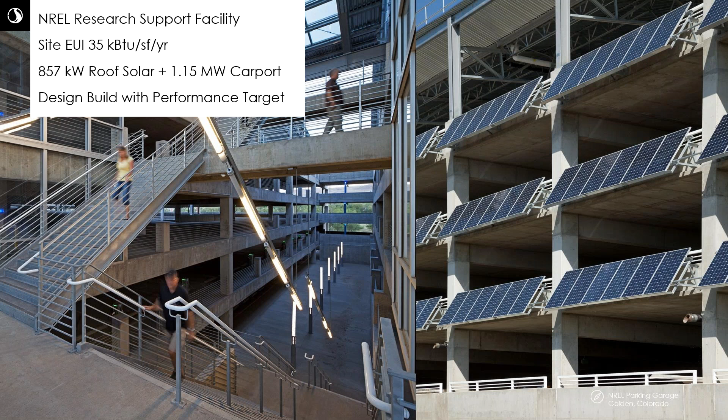And the innovation here we're seeing is that the client is going into a lot of detail on how they're using the energy model, the requirements that they're looking at through design of how the energy model is being used to track performance, and also post-occupancy. A lot of post-occupancy work is going into this building. So in this case, there were 2 goals and 3 model uses.

Next slide, please. Goal number 1 was we were given a site EUI goal, not to exceed. Goal number 2, we had to achieve net zero source energy with a 10% safety factor. And if that net zero source energy is not met, the design build team needs to come back and install either additional PVs or implement additional EEMs, energy efficiency measures, to get to net zero.

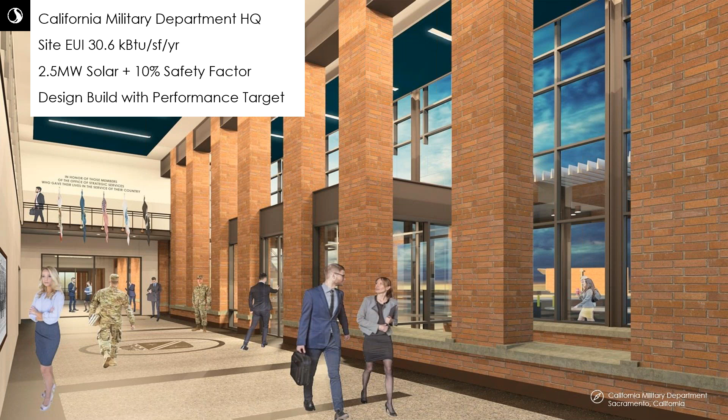But the PVs can only address a maximum shortfall of about an EUI of 5 kBtu per square foot per year. After that, we have to put in EEMs. And we all know how painful that is, to come back to a project after it's been built and address additional EEMs. So that's a pretty high target. Next slide, please.

And to add to that, on the California Military Department headquarters, we were asked to model the building in 3 different states. One was cold shell, so it's fully conditioned but unoccupied. The next was occupied and conditioned, and the next was occupied, conditioned, and adding in PV.

And I'll go into more detail on that later, but it gives the client the ability to monitor the impact of occupants on the energy use, comparing the building unoccupied and occupied, and also sets up a level of accountability for the design team to meet those goals. And that's what I mean by innovation in the playbook, a level of sensitivity and accountability. So this project actually just opened up last month. So the building is up and running. We just don't have an updated picture of it.

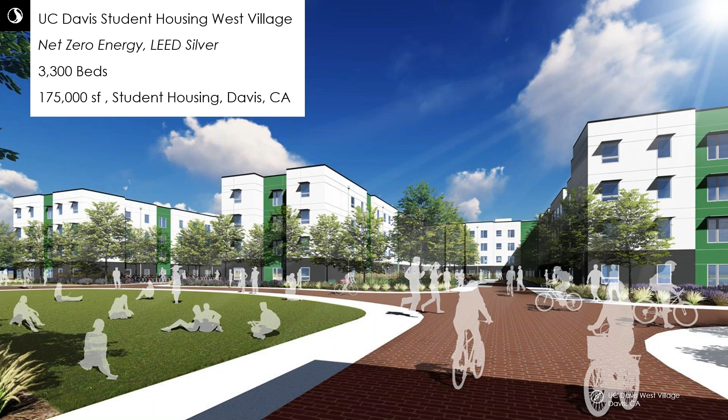And student housing may sound like a simple and fairly repetitive building type to do the net zero math on, but that equation gets very complicated once you factor in the known unknowns, should we say, of all the equipment, whether it's beer fridges or TVs or lava lamps, whatever students are putting in their dorm rooms. Those tend to complicate the energy model because those plug loads are often a shot in the dark, as I'll talk about later on. Next slide, please. In addition to a lot of on-site food services that come with student housing, and let's not forget the room dedicated to Amazon deliveries, all the good stuff for today's lifestyle.

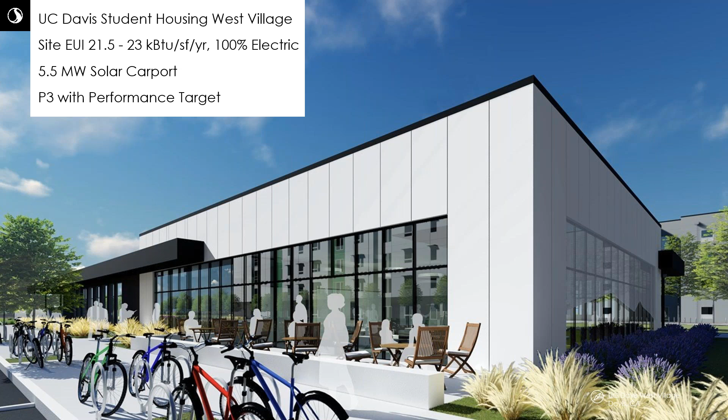Next slide, please. We're also seeing, when I go back to what I talked about, playbook, place, and how to scale these buildings. We're also seeing the portfolios moving from net zero energy to net zero carbon, and from the boutique buildings to the speculative template-driven buildings, which is fantastic, and that's how we scale. And this leads to the next innovation I'm talking about, that is place.

This is evolv1. It's Canada's first building to achieve zero carbon design certification from the Canada Green Building Council. And it's located in a research and technology park, the David Johnston Research and Technology Park in Waterloo, Canada. This project was led by the Cora Group, who are a fantastic community-minded, innovative developer in Waterloo. And they really decided that they wanted to redefine spec development. They wanted to raise the bar for what an office building could achieve.

And they asked for a carbon neutral office building that prioritized occupant health and well-being, built at market rate, that's critical, and that could be used as a template for the next generation of speculative office buildings.

Next slide, please. The building was occupied in late 2018, so it's just about coming up on its 1-year measurement verification period. And for those of you familiar with the Canada Green Building Council Zero Carbon Building Standard, the building is 105% energy positive, thanks to a lot of PVs, and you see this amazing solar carport here, and then there's PVs on the roof, but also really attention to the building envelope and internal loads, and brought that EUI down as much as possible. And in addition, it's on track to achieve carbon neutral status on an annual basis.

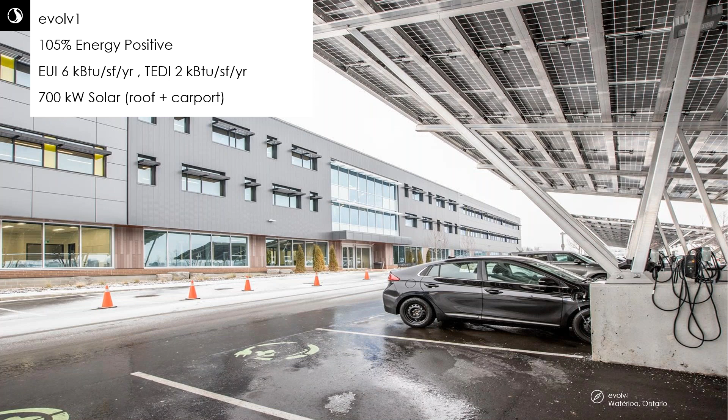And interestingly, in terms of talking about raising the bar for goals, net zero energy is kind of the baseline. In addition to meeting the EUI goal, the team also met the maximum threshold for TEDI, which is not a soft toy that was kept in the office for hard times, but TEDI stands for Thermal Energy Demand Intensity, which is a metric in the Zero Carbon Building Standard that looks at the annual heat loss from the building's envelope and ventilation after solar heat being accounted for. So I'll cover this later, but again, EUI and net zero energy is not just the end goal here. Next slide, please.

And so there's a list of all the systems, and based on the time we have for this presentation today, I'm not going to go into detail on all these systems, but hopefully you can see that there's nothing here that really is not in the marketplace already. However, there is one thing, that this was the first building to tie into an open loop geo-exchange field in Waterloo. But other than that, the market has all these systems already.

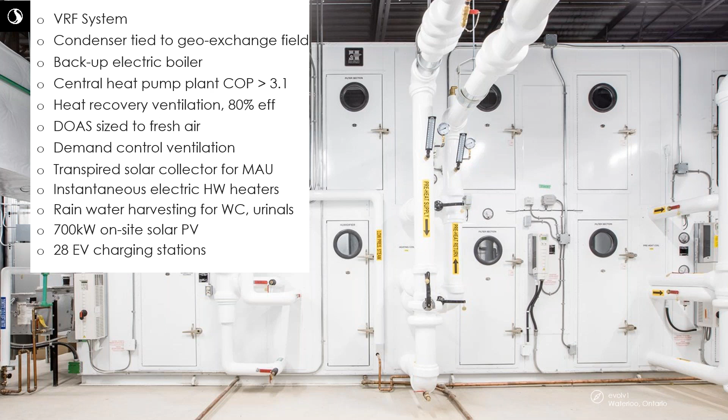What's unique here was, first of all, we used parametric design modeling to make decisions from day one that included a whole range of factors, and very quickly turned through a number of different design decisions. And also with an eye on market rate construction costs, and looking at how the carbon intensity of the grid was impacting the design of this building. Next slide, please.

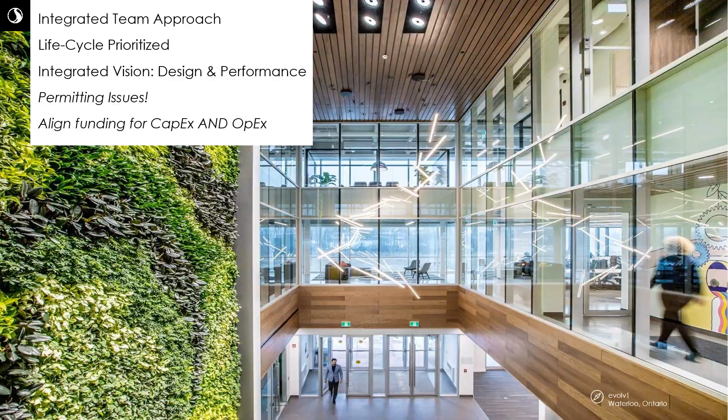We also looked at, I mentioned this was driven by health and well-being. So the University of Waterloo is carrying out extensive post-occupancy research into the impact on health and well-being of the folks in this building, working in a high-performance building that prioritized daylight and healthy materials and so on. And this was a speculative office building, but it was at full occupancy from day one. So the messaging around this is a high-performance building, it's carbon neutral, this will support your corporate sustainability goals, was very, very impactful. Next slide, please. Actually, if you can jump to the next one as well, in the interest of time.

So when I talk about the playbook, it's not just about the energy model, but also about other technology that's entering the design process. So, for example, virtual reality is becoming very helpful as we're putting more and more sensors and controls in our buildings. Being able to use virtual reality to let occupants and facility managers walk through the building and learn how to use it before day one, that is also critical in meeting any net zero energy or carbon neutral goals. And it also helps make decision making much faster based on more detailed information. Next slide, please.

And then also on the envelope side, I mentioned this new metric TEDI, which has really been something quite interesting to consider, because what it does is it results not only in greater occupant comfort, but also it really ensures that designers focus on minimizing the building's energy demand prior to procuring renewable energy. And so it's not just business as usual with a massive PV array on top. It's looking at really dialing in this energy use.

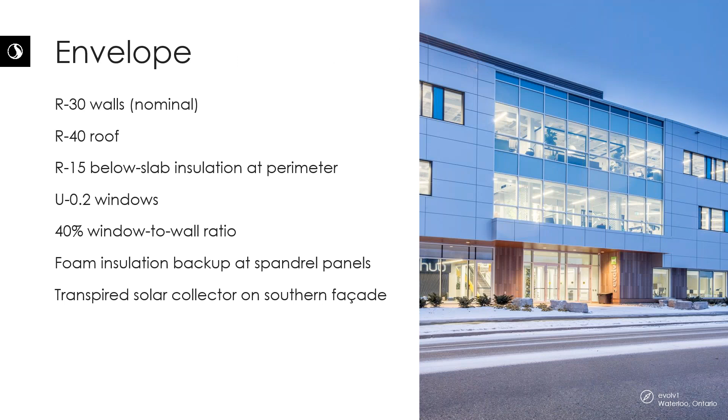But what I did want to say is, as we're looking at energy performance, and as we're looking in more detail at the envelope, I do think this is an area that we're seeing significant innovation, and not just for comfort. Looking at envelope is not just about maximizing leasable space in perimeter zones, but we're also seeing this become a matter of survival, particularly in the face of our changing climate these days. At Stantec, we do a lot of work in communities, in remote locations, both hot and cold, where survival and the impact of the envelope is really significant.

I'm going to end with this slide. This is a study that was done fairly recently, where we looked at 4 different house type constructions up in Yukon, northern Canada, Yukon territories, which is really, really freaking cold. And we looked at what happens to the internal temperature once a winter storm hits. The power goes out, you have no mechanical heating. What happens to the internal temperature in that house as the days go by? And you can see the spikes are due to global radiation, where the sun came out.

And the difference between the standard 1980s construction and the passive house type construction is the difference between 19 hours and 216 hours before the temperature fell to a temperature that was harmful to health. That's the difference between first responders having to reach a community of vulnerable populations the day of a storm, versus having a few days and knowing that as long as that person has food and water, they're going to be okay. So when we talk about envelope performance, it's not just about comfort, but it's also turning to a matter of survival as well.

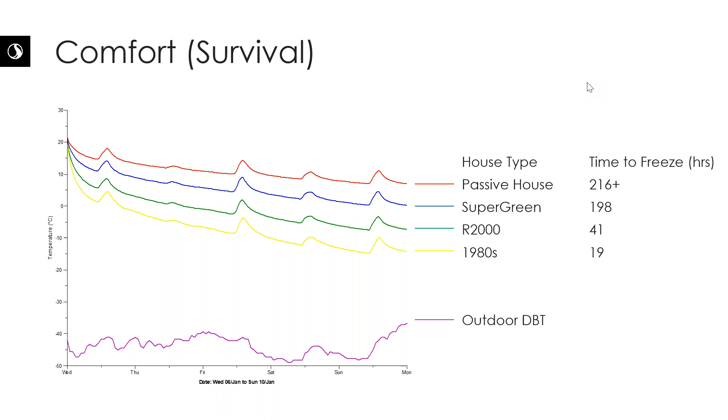Thank you so much, Rachel. That was excellent. And I really appreciate how you covered a landscape of a number of different very impressive buildings. And in a number of them, I noticed that you mentioned cost considerations too, and cost constraints of whether it was market rate or a fixed government budget, that you were able to achieve that type of performance on budget, just by using some of those techniques in the playbook and modeling and prioritizing performance specifications. So thank you, that was excellent.

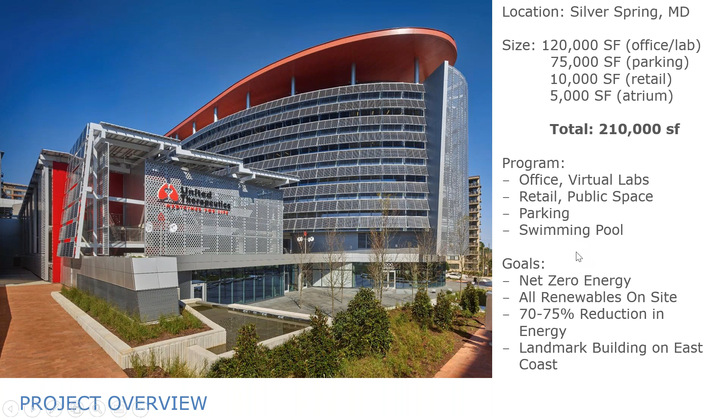So when we talk about design process for net zero, it's a little bit different than our traditional design process. So before we even put pencil to paper on the design, we start with a goal setting and benchmarking exercise where we look at energy use intensity and what we think we can realistically hit for the building.

Now, the challenge with this building was that in 2011, there wasn't a whole lot of data available for low energy buildings, certainly nothing of this size or in this location. So we took the information that was available, what little information there was, and we supplemented that with our own energy modeling to begin to set those goals and benchmark.

We then moved on to early modeling of modules. So instead of just jumping in and modeling the whole building, we looked at a typical module, like an office module, a conference room module, et cetera, and we began to optimize each of those on their own, looking at things like the envelope, lighting, equipment loads, HVAC system type, et cetera. And once we really optimized that, then we could extrude that out to the entire building.

We then continued to model all throughout design using the energy model really as a decision-making tool in our process. And then we continued that modeling through construction so that we could ensure that the model was as accurate as possible when we went into our post-occupancy measurement and verification period. So at the end of the day, it doesn't come down so much to form following function or function following form, but it's really about the two informing one another.

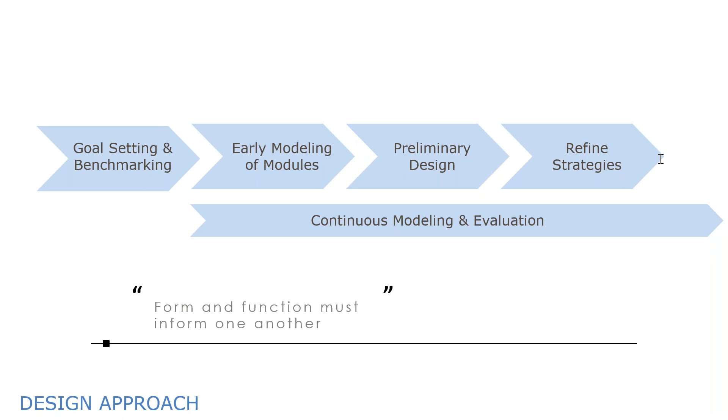So early on, we wanted to set the expectations for the building. Some people might have a negative connotation of net zero buildings, thinking that they're going to be underlit or hot in the summer, cold in the winter. So we really wanted to set that expectation early. So working with United Therapeutics, specifically with their CEO, we talked about expectations for the interior environment.

Most specifically, were we going to design to ASHRAE 55, which is the thermal comfort standard, or were we going to do something outside of that envelope? And ultimately, it was decided that we would design to ASHRAE 55, but we would be at the edges of the envelope, which would result in temperature and humidity swings throughout the course of the year.

The way we corrected for that was by providing a higher level of individual control in each zone. So within each office, the occupant has control over their temperature. So there is a thermostat in every office. It is limited by the BAS to 1 degree in each direction. They have control over their lighting, both at the task and the overhead level.

They have control over air movement through a ceiling fan in each room. They have control over daylight penetration into the room through an electrochromic glazing system. And during certain times of the year, they can even control the amount of ventilation to their space through operable windows.

But the other piece to this was really to train and educate the employees about their role in the success of this net zero building. And the way that we did that was by using data that we have available through the building automation system and feeding that back into the spaces so people could understand how the building's performing. And I'll touch on that a little bit at the end.

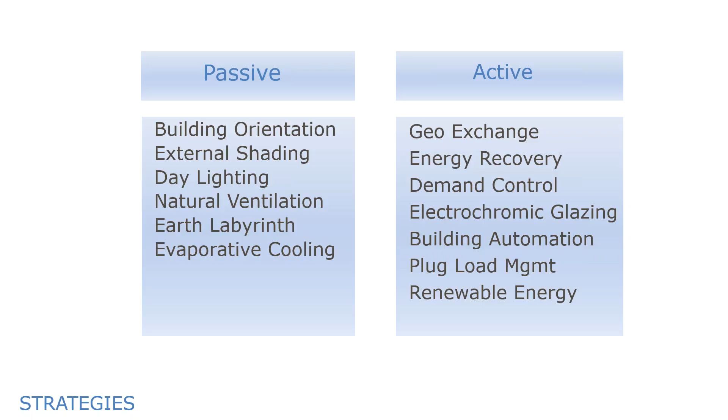We knew that energy generation was going to become our limiting factor, and that caused us to actually adjust the program in order to meet the net zero goal, which dictated size of the building, number of occupants, and even the activity levels that we could support in that building.

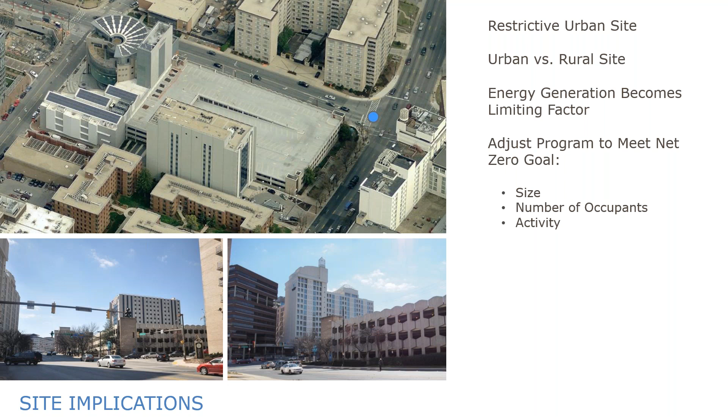The elliptical form has an atrium in the center. There was a real benefit to this because it provides a relatively shallow floor plate, only about 40 feet at its deepest dimension in the office. And that's very good for daylighting and cross-ventilation of air in natural ventilation mode. In addition to that, to encourage stair travel, we hung a monumental stair in the atrium, which is visible from all areas of the office, and we pushed the elevators to the far ends of the floor.

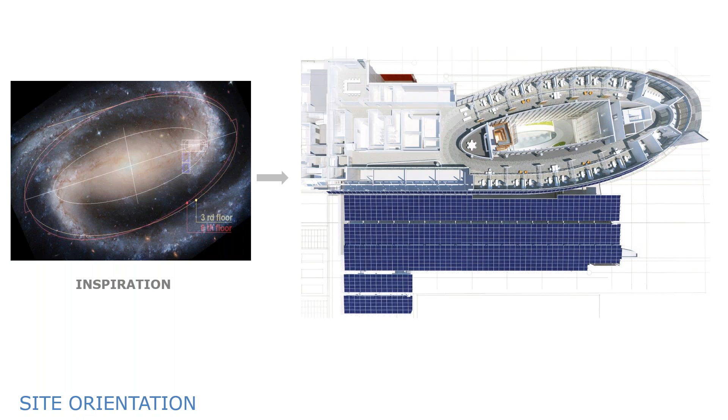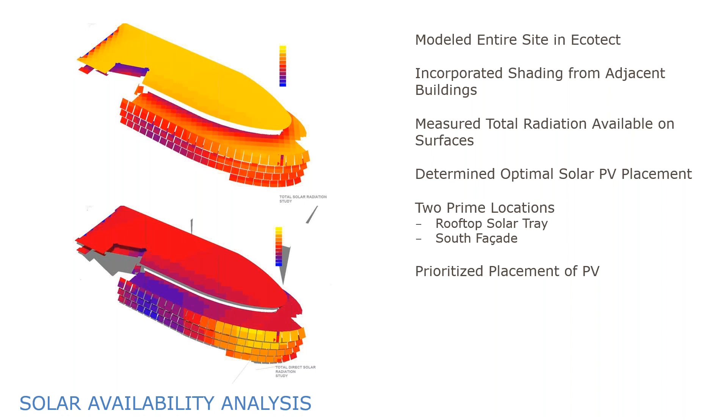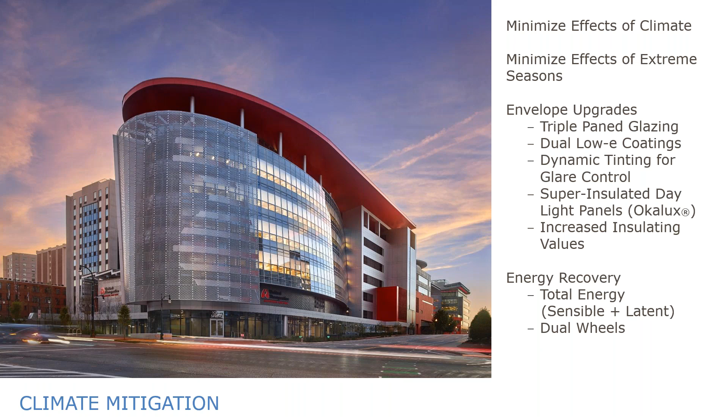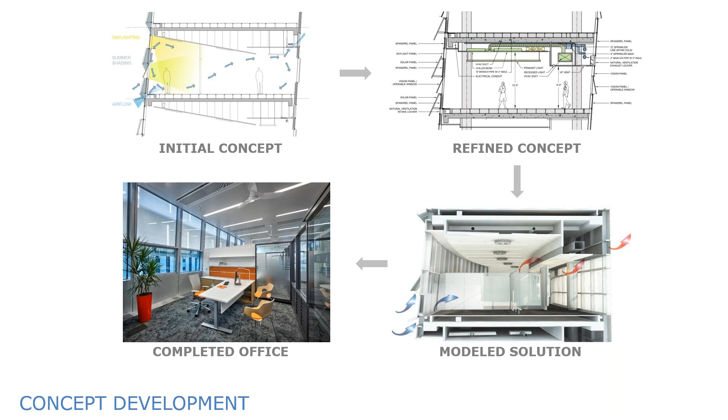Generation of the concepts and development, we kind of started in the top left, understanding how air and light move the space. We then moved into our DD phase and refined that concept, overlaying the engineering systems and really beginning to understand that southern wall and all of the aspects and elements that are on that wall. We then modeled the entire solution in BIM and then actually completed the offices to make sure that they turned out as we intended. Next slide, please.

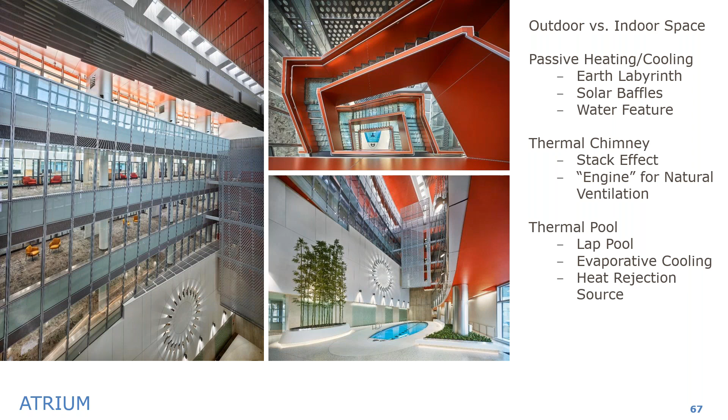The atrium is a key design feature of the building. One of the interesting features is that it is not an actively heated and cooled space. It is passively tempered through an underground earth labyrinth, which I'll touch on in a moment. In addition to that, we use the form of the building, the height of the atrium, to create an engine for natural ventilation through stack effect. So the atrium actually induces airflows through the building in natural ventilation mode. And finally, there is a swimming pool in the atrium of the building, and we actually use that swimming pool as a heat rejection source for extra heat that we have in the building. Next slide, please.

The atrium is passively heated and cooled through a 1/4 mile long underground concrete earth labyrinth. It has 3 chambers and a bypass that we can modulate airflows through. It uses essentially the thermal mass of concrete in contact with the relatively stable temperature of the Earth at 4 meters depth to provide some heating effect in the winter and cooling effect in the summer. We have been through both the heating and cooling season with the labyrinth, and it has exceeded everyone's expectations. Next slide.

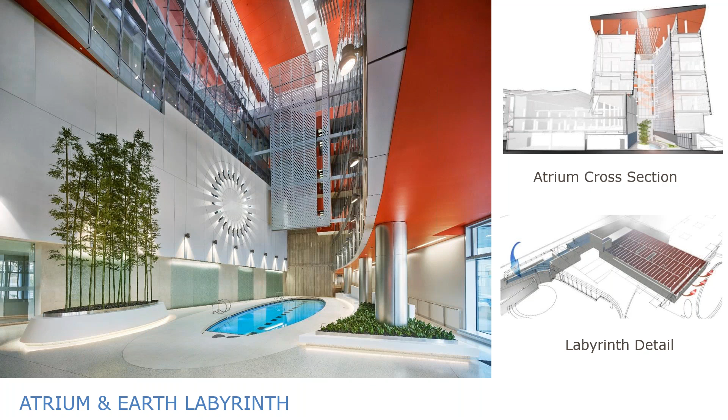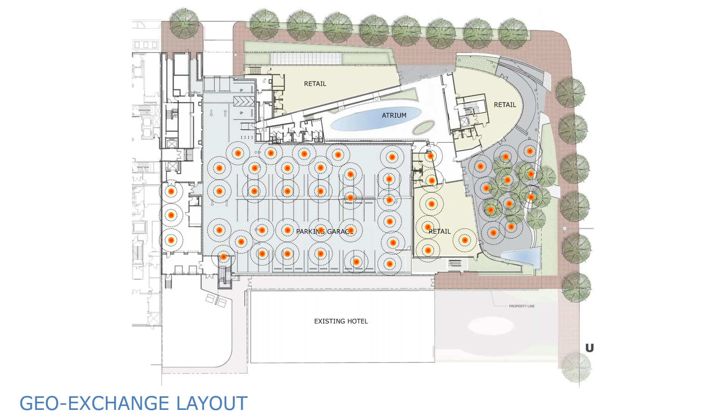Speaking of relatively stable ground temperatures, the geo-exchange system consists of 52 500-foot deep wells that are located on the site, mostly beneath the building. That actually required getting regulations in the state of Maryland changed to do that, but that is one of the requirements when you're on a tight urban site. You don't have a large area to put the wells outside of the building footprint. Next slide. And then the geo-exchange system feeds into a series of water-to-water heat pumps, and they feed an active chilled beam system for the office. We modeled several system options, and we found this to be the best option for this particular project. Next slide, please.

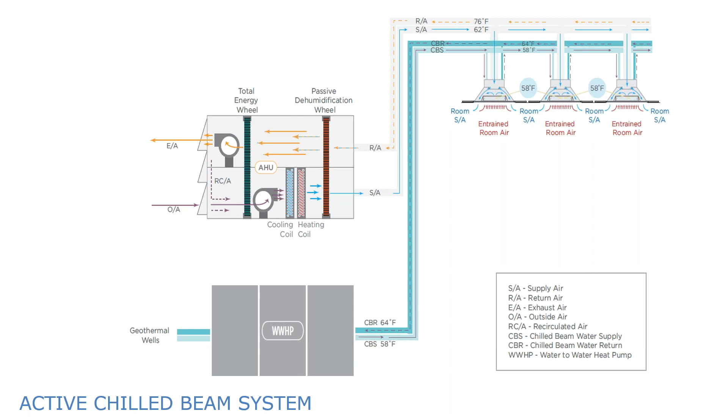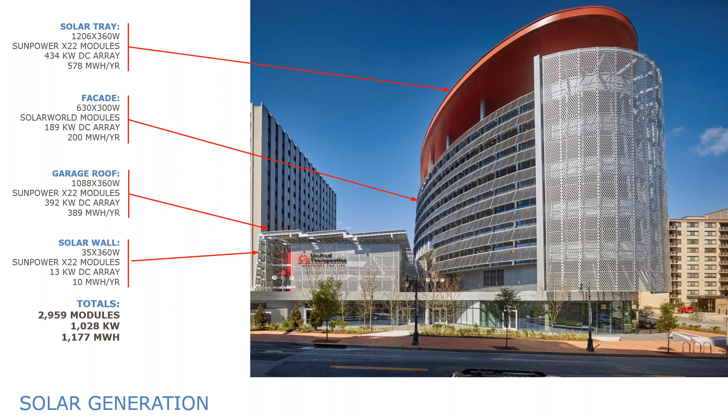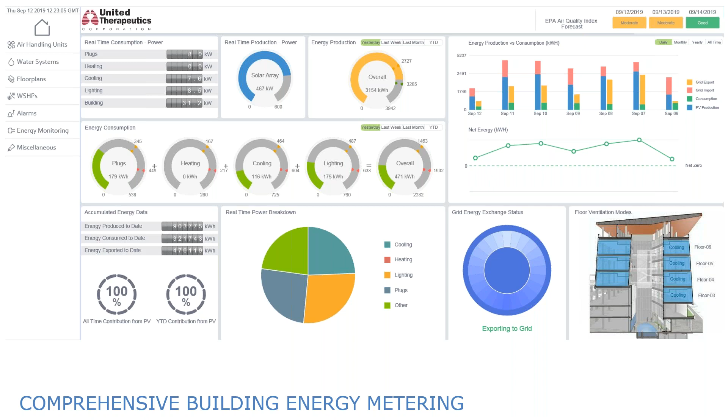So one of the keys in a smart building is that we have over 11,000 integrated devices, 6 control platforms that are integrated into one dashboard. So what do you do with this intense amount of data? The solution here was to provide a custom dashboard, which is a red, yellow, green dial system that the facility operator can, at a simple glance, understand how the building is performing, and then click down to the appropriate level of detail to do any troubleshooting that they might need to do. Next slide, please.

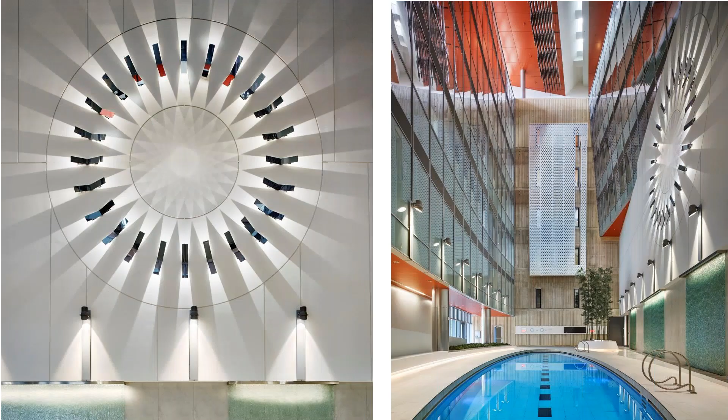And finally, we did a large-scale display in the atrium. This is an LED light display that essentially gives a real-time sign of how the building is operating, whether it's exporting or importing energy. So if the lights of this dial are shining inwards, we're importing. If they're shining kind of in this form, inward and outward, we are actually net positive at that moment in time. And that's just a quick way. This is visible from all the office areas for people to understand how the building's operating. Next slide, please.

So with that, that's my last slide. The building, like I said, has been running for about 6 months. Our modeled EUI was 26. We're running about 20% below that number, which is a good thing. So with that, I thank you.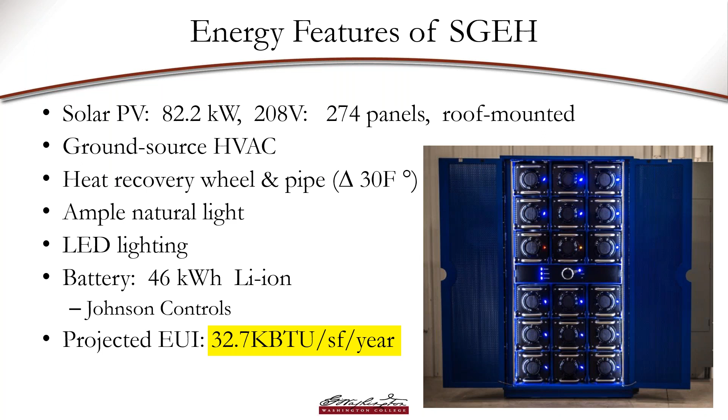So again, the decision-making metrics to get here: we really wanted to honor Mr. Semans and Dr. Griswold. The donors for this building, who we recruited from supporters of the Center for Environment and Society, really drove the decision to make this a green building. I don't even think all of the donors completely understood what that meant, but they do understand that green buildings are important to campuses and that green buildings drive things like enrollment and public image, as well as the physical sustainability for the college.

This was a pretty expensive building on a per square foot basis. If you run the numbers in your head there, you're looking at $12 million for about 10,000 square feet. And we took a lot of heat from our construction management staff for those numbers. But we certainly are hoping that the building never has an energy bill and provides us with a lot of resilience going forward in an area where we know there's going to be a lot of stresses on the electricity grid as climate change catches up with this region.